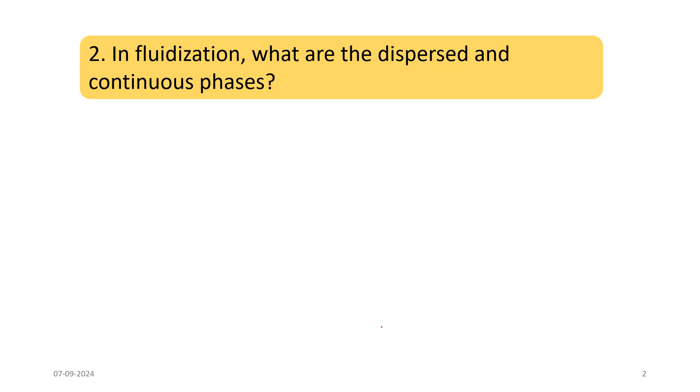In fluidization, what are the dispersed and continuous phases? So, gas or liquid acts as a continuous phase and solid as the discrete or dispersed phase.

Because in the fluidization bed, you have noticed that liquid is coming from the bottom portion and there are solid particles inside it which are floating, and sometimes gas is also there to create bubbles inside the fluidization bed. So gas or liquid is the continuous phase and solid is the dispersed phase.

Next, fluidized beds have what kind of pressure head due to gravity? Static pressure. Yes, the answer is static pressure.

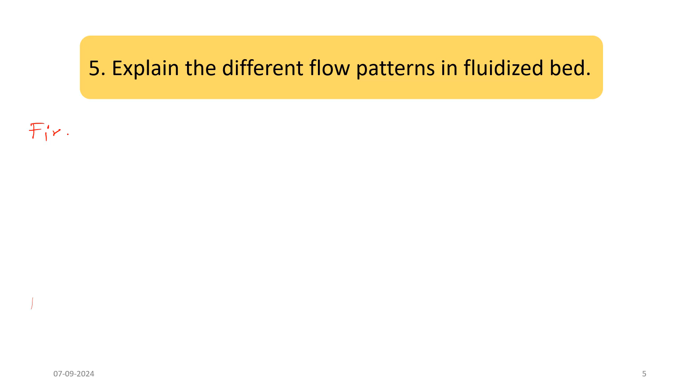Next question: explain the different flow patterns in fluidized bed. Suppose the first one is the fixed bed or packed bed. Here the liquid is filled and it is not moving. It is coming from the bottom and it is fixed, and there are particles inside it, so it is not moving. This is called fixed bed.

Now in the homogeneous bed, the liquid velocity is a little bit increased. So the fluid and the particles inside started mixing with each other and create a homogeneous mixture inside the bed. That is called homogeneous bed.

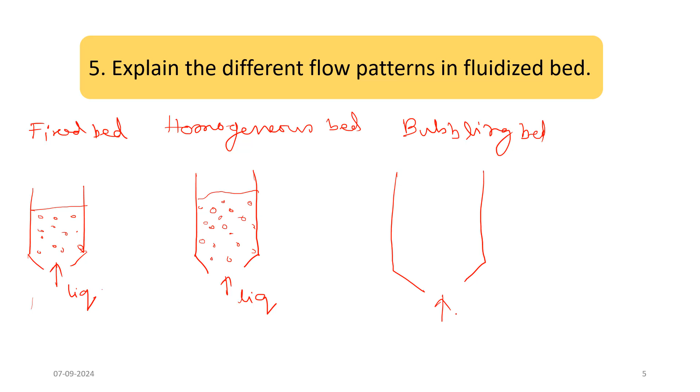Next one is bubbling. In bubbling bed, what happens: now the liquid or gas velocity is further increased. It was very low, then increased here, then increased even more. So because of the solid particles and this higher velocity, the gas will create some bubbles inside it. That is the bubbling fluidized bed.

Next, if the bed height is very long and the diameter is very low, then this bubbling bed is called slugging. The same phenomena, but here the bubble size is a little bit bigger as it goes upward, and solid particles are there and liquid or gas is coming from below. This is slugging.

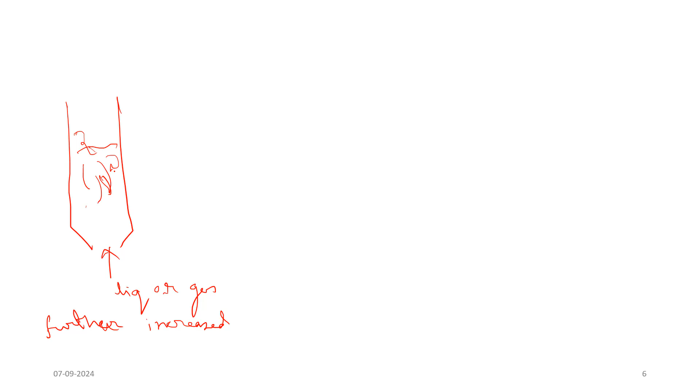Next, the liquid or gas velocity is further increased. So what will happen? It will create some chaotic kind of motion - the bubbles will burst and create chaotic motion inside it, with particles present and fluid or gas creating chaotic motion. So that is called the turbulent bed.

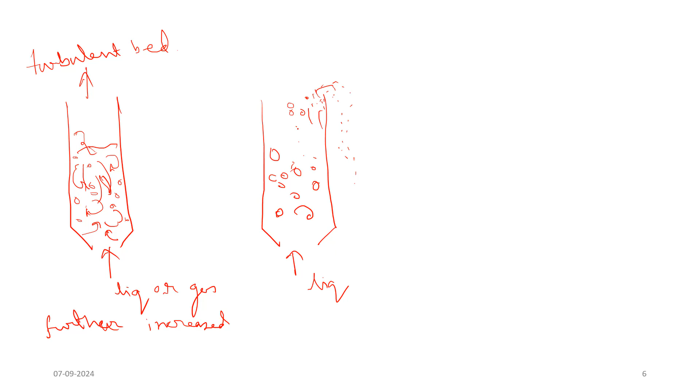And after some time, if we keep increasing the velocity of the liquid inlet, some bubbles or chaotic motion will be there, and some solid particles will be sprouted out from the bed. If particles at the top position of the bed are thrown out of the bed, that is called fast fluidization bed.

After the fast fluidization bed, if almost all the particles are thrown out, then the particle density or concentration will be very less inside the bed, because most of them are thrown out. So very little amount of particles are left in the fluidized bed, and that is called pneumatic transport. These are overall the different types of flow patterns in the fluidized bed with respect to liquid or gas velocity.

Next question: explain the contacting method in fluidized bed.

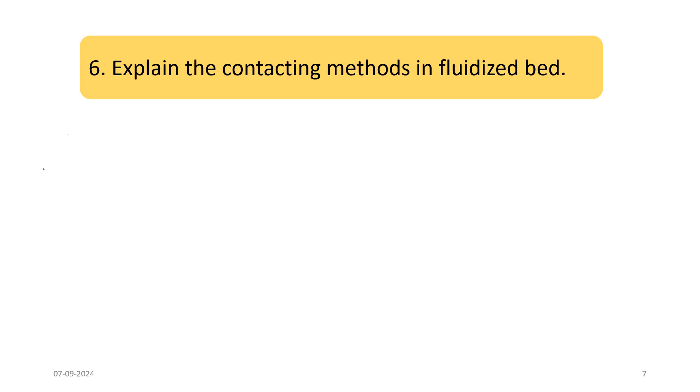Let's explain the contacting method inside the fluidized bed. Inside the fluidized bed, we look at how particles are contacting with the fluid, how fluids are contacting with the solid particles, and how the mixture will work. It is not always that fluid comes from the bottom and solid comes from the top too - it is not like that always. Suppose this is a batch process, it can happen in five different methods.

The first one is the batch process. At a time, some amount of solid particles are given inside the bed, and there is a limited amount of fluid, and the fluidization process is happening. The mixing is happening.

Next one is the co-current. In co-current, liquid is coming from the bottom and solid is also inlet from the bottom, and it will start mixing and both of them will be taken out from the top. So this is co-current.

Next one is the counter current. From the name itself it is very clear what it is. Here the direction of inlet and outlet are opposite. Suppose from the bottom liquid is going in and from the top solid is given inside the bed, and now liquid is taken out from the top, and from the bottom solid is taken out. So the inlet and outlet positions of solids and fluids are opposite - that is counter current.

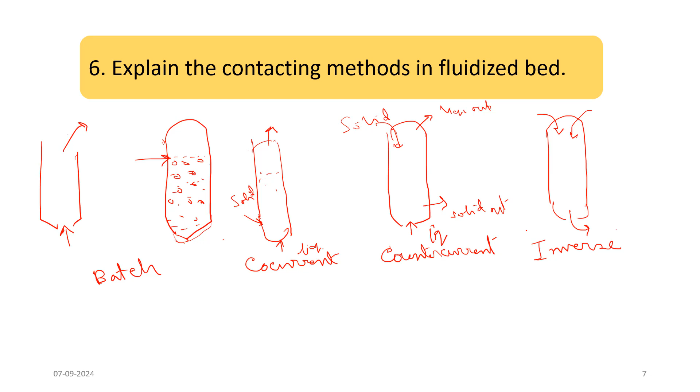Next question: explain the different types of fluidized bed. We'll see one by one the videos of it. I've just told what the fluidized beds are, and we'll see from YouTube so it will be more clear.

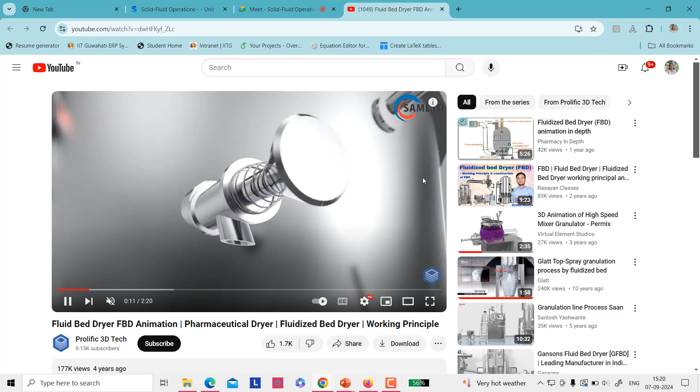This one is the fluidized bed. These are the different parts of the fluidized bed. Particles are given, and with the pressure of this valve and all, pressure is created inside the bed and the fluidization will start.

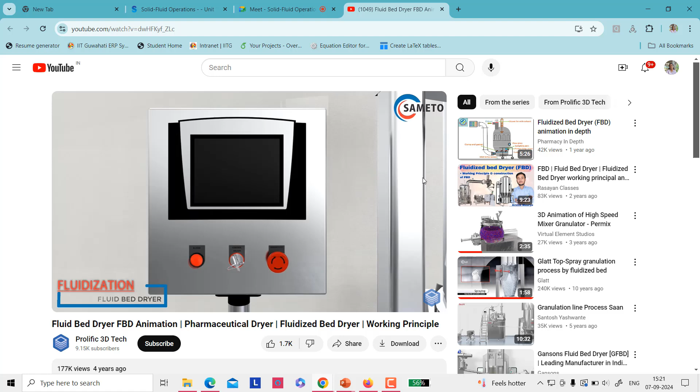You can see that due to the gas or whatever is inside it, solid particles are trying to mix with each other. So this is fluidization in general.

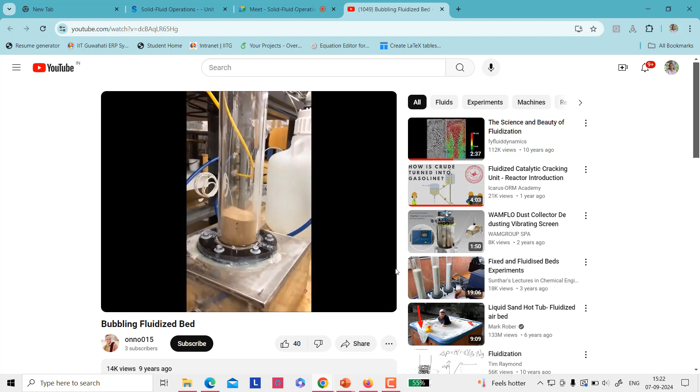Then this is the bubbling bed. I just told that bubbles are coming because the liquid velocity or gas velocity is very high from the bottom, so it creates some pressure inside the whole mixture and creates this kind of bubble. That is bubbling bed or slugging - if the bed is very tall, that is slugging.

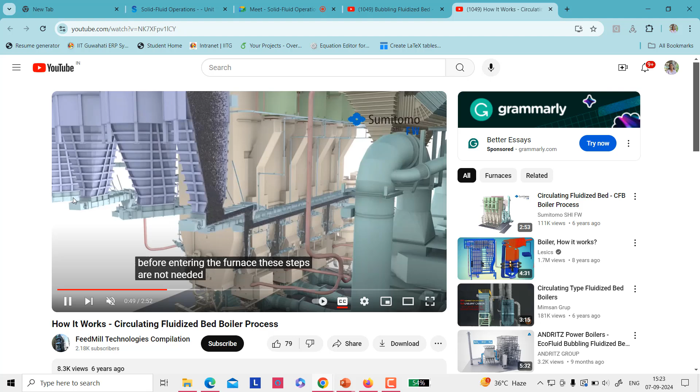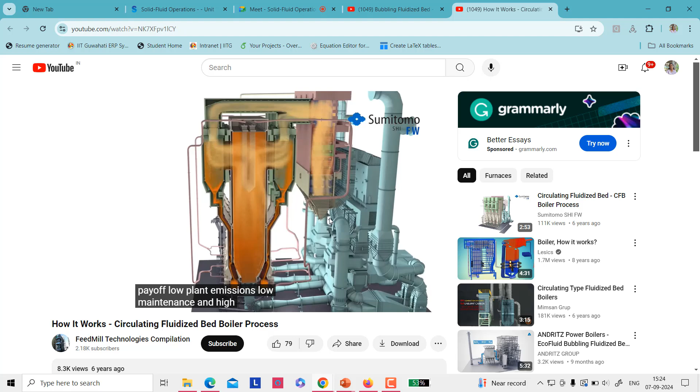You can see there are two extra portions of this circulating bed which are not there in case of a plain fluidized bed. With the help of this, they are maintaining the temperature and the mixing will be good. Heat efficiently throughout the entire burner while fouling and corrosion are minimized. The payoff is low plant emissions, low maintenance and high plant reliability. These extra things help in good combustion, heat efficiency and economic feasibility. So this is a circulating fluidized bed.

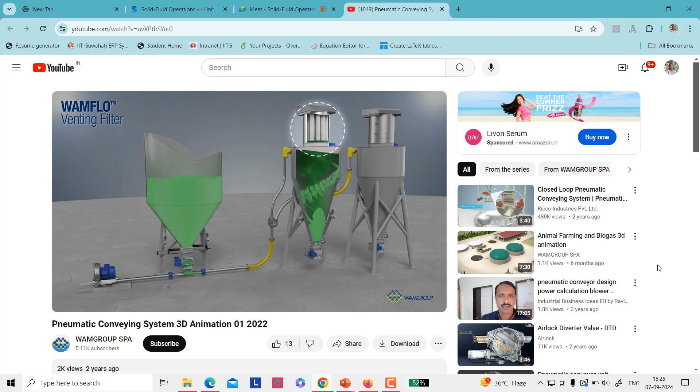Then this is the pneumatic one. Pneumatic means all the particles are out and it is creating a homogeneous kind of mixture. Very little amount of solids are left inside the fluidized bed. So this is a filter.

So this is for a particular company structure, that is why they are showing it.

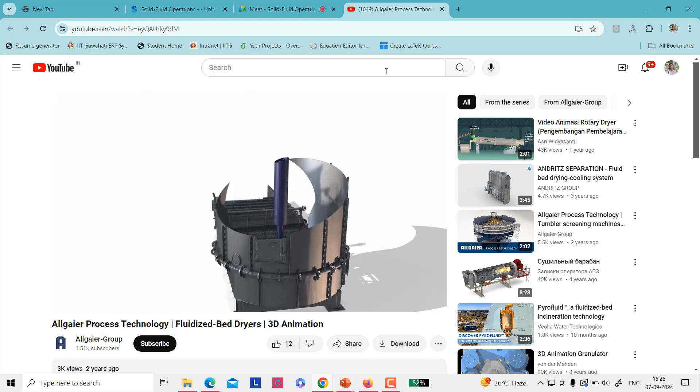Next one is the horizontal, or horizontally/laterally staged fluidized bed. Here cross-current flow or cross-current contact happens between the solid particles and the gas particles.

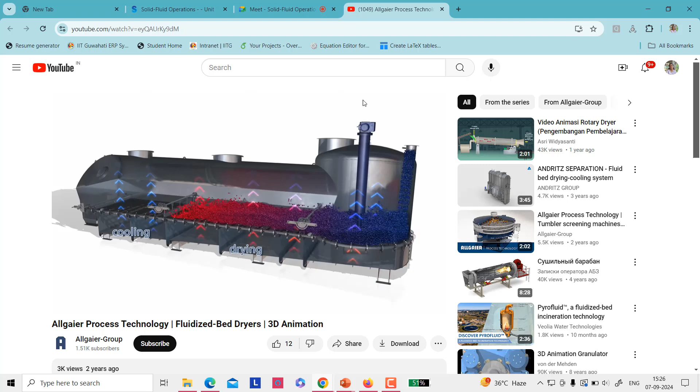You can see the products are feeding, and from each portion some gas is coming for a different purpose - someone is drying and someone is for cooling, but it is a cross-current contacting method. So particles are dried, then cooled.

So this is the example of a lateral staged bed, which uses the cross-current contact method.

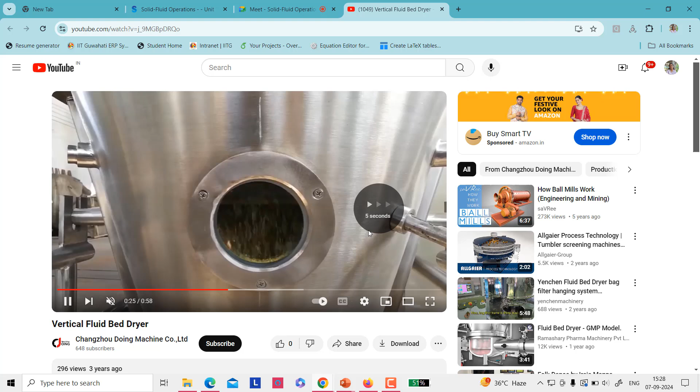This one is the vertically staged bed. All are vertically staged beds we generally notice, so this is one of them. You can see how the fluidization mixing is happening.

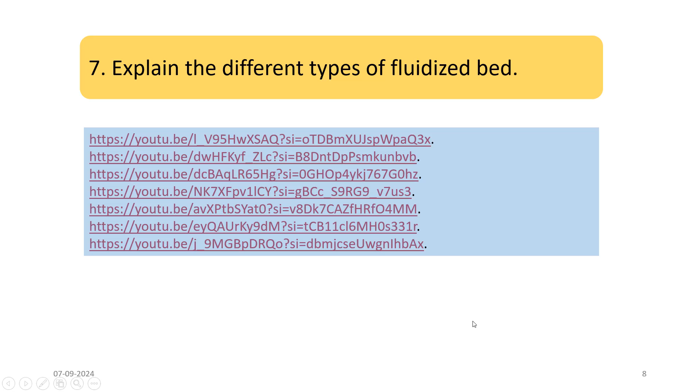So this one is the turbulent one. Here you can see the velocity of the gas is very high, and that is why it is creating a random kind of chaotic motion inside the fluidized bed, which is called the turbulent fluidized bed.

And this one is the spouting bed. Here you can see that from one portion the gas flow is coming, and that is creating some kind of jet inside the fluidized bed. From the top portion, this phenomenon is called spouting - all the particles are falling down, so that is called the spouted bed or spouted fluidized bed.

Next, some advantages and disadvantages of the fluidized bed. First, inside the fluidized bed, solids and liquid mixtures are there, and they behave like a liquid - the solid particles also behave like a liquid. So that is why it is said to have liquid-like behavior.

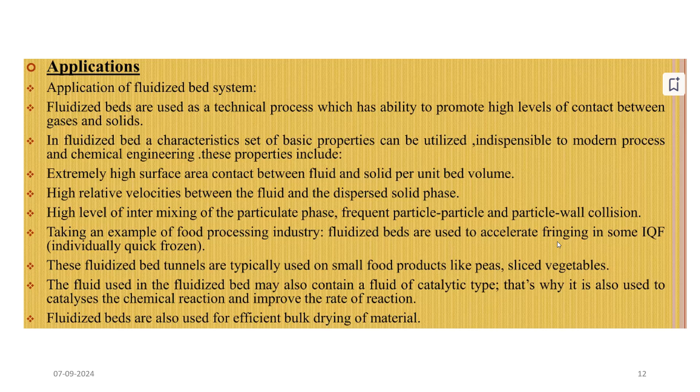This includes drying, coating, coating of the catalyst, granulation, heat treatment, annealing, blending, classification, adsorption, and roasting. So these are all the applications of fluidized bed.

It increases efficiency in dryers by allowing the entire surface of the subject being dried to be suspended and therefore exposed to air. This process can also be combined with heating and cooling, as we have seen in a video of continuous heating and cooling of the solid particles.

Fluidized bed dryers are used in drying various materials such as powder, tablets, granules, coals, fertilizers, and plastic material. Anything can be dried in the fluidized bed. This process is also used in the granulation of pharmaceutical powders.

Fluidized bed coaters are widely used for coating powders, granules, tablets, and pellets, held in suspension in a column of air. Fluidized bed coating is used for taste masking, enteric release, and barrier films on tablets and powders.

Bottom spray coating is used for sustained release and enteric release products, also employed in non-pharmaceutical fields in comparison to their use in pharmaceutical fields, as there are numerous apparatus, process, and product parameters that affect the quality of final pharmaceutical products. So its application is huge.

Next, what is FCC? That is fluid bed catalytic cracking. It is an industrial process. What is that? We'll see.

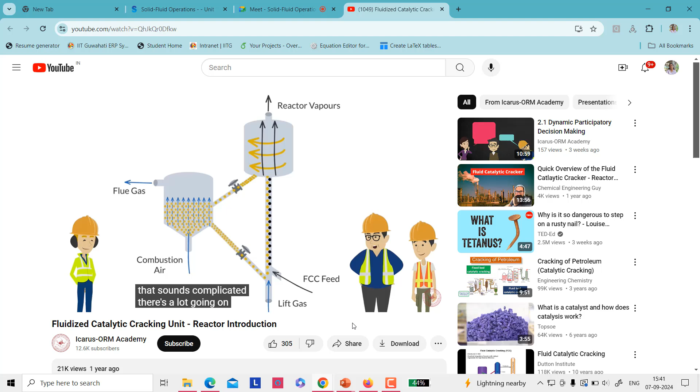Catalyst flows out of the regenerator and mixes with the hydrocarbon steam line. The reaction occurs quickly and the catalyst is deactivated by the reaction depositing solid carbon or coke on the surface of the catalyst. Then it is recycled back to the regenerator. Firstly, the deposited coke on the surface reacts with air. That sounds complicated. There is a lot going on in the reactor and regenerator.

So lift gas and FCC feed is entering from here. Hot regenerated catalysts - catalysts are reusable, so that is why they are regenerated in the last reactor and they are coming back to the reaction.

So heat quickly causes the long chain hydrocarbons to crack, which is an endothermic reaction, and it will reduce the temperature. Coke forms on the surface of the catalyst and reduces it. The cyclone in the reactor disengages the catalyst from the hydrocarbon vapor stream and the vapor exits the top of the reactor. Now the catalyst collects above the spent slide valve and flows to the regenerator.

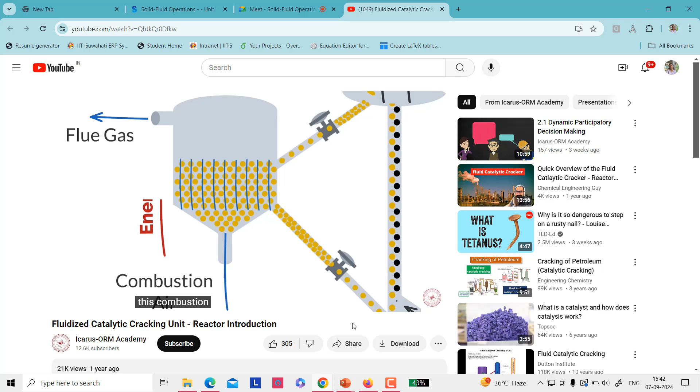This one is the regenerator. Air enters the bottom of the regenerator and combusts with the carbon on the spent catalyst. The temperature in the regenerator is high enough that it auto-ignites this combustion. Here the energy or temperature is increasing for the cracking. So this combustion is providing all the energy.

So this is a continuous process of FCC. The flue gas exits the regenerator, removed downstream, and heat is recovered before it is vented to the atmosphere. So the reactor here we are using in different phases. That is nothing but the fluidized bed reactor. Different kinds of fluidized bed reactor.

In order to circulate the catalyst through the system, the FCC reactor is a high-risk process to operate as there is an oxygen-rich atmosphere in the regenerator connected to the reactor, which is a hydrocarbon-rich atmosphere operating at a temperature above that required for auto-ignition. The consequences of misdirecting air into the reactor or hydrocarbon into the regenerator are a fire or potential explosion. So that is a different thing.

So the main thing is, in the FCC plant, the reactors used are fluidized bed reactors because here the gas is generated and coming through, but here the catalyst is a solid catalyst, which enhances the process. So this is the overall overview of FCC.

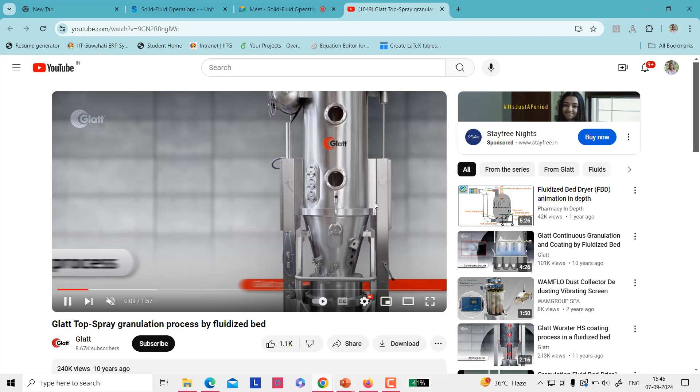So feeds are charged inside the fluidized bed, which is a charging process. Then fluidization happens because gas is coming, a constant air stream is coming from the bottom. And now spraying is happening, a reproducible granulation process, so one particle is attached to another particle and it creates granules of multiple particles.

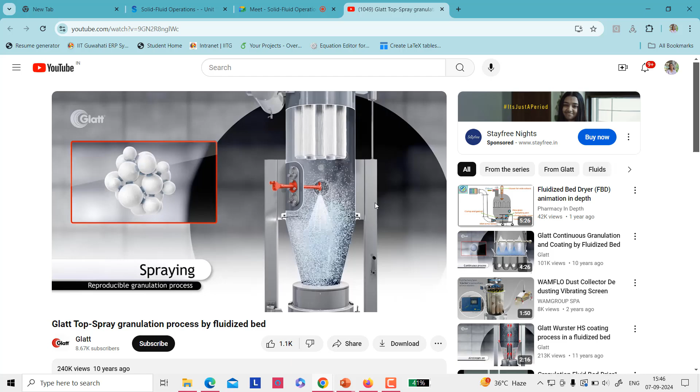So after the formation of granules, there should be a drying process. So finally they are dried. Now fluidization is off and the dry particles are ready, ready for discharging.

So these are the filters they use to maintain it. This is a nozzle from where the spraying is happening. Atomizing air or liquid, both can be sprayed. So this is the whole granulation process.

Next, the velocity where the frictional force between particle and fluid just counterbalances the weight of the particle is called what? The velocity where the frictional force between particles and fluid just counterbalances the weight of the particles is called what?

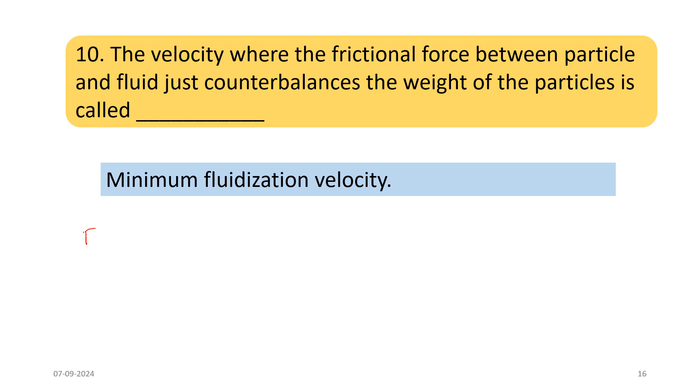At this velocity, all the particles are just suspended. That means this is the situation between a fixed bed and a fluidized bed. In the fixed bed, the particles are fixed, and in the fluidized bed, all are moving. So minimum fluidization means the particles are just suspended inside the bed. That moment is called the minimum fluidization velocity, and at this point the frictional force between the particle and the fluid just counterbalances the weight of the particle.

Next, what is the value of the minimum fluidization void fraction for spherical particles? What is the value of the minimum fluidization void fraction for spherical particles?

So what is the value of minimum fluidization void fraction for spherical particles? 0.4 to 0.45. Yes, 0.4 to 0.45.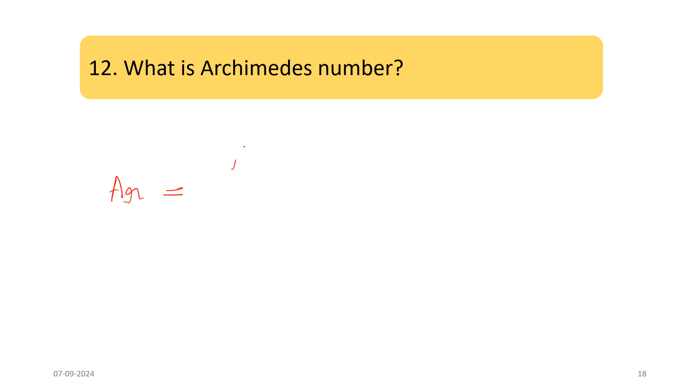From the minimum fluidization velocity derivation, which we'll see later, the Archimedes number comes out. The expression is rho F into rho P minus rho F, into dP cube G, by mu square.

This is the expression of Archimedes number. How this is coming, we will see the derivation after some time. Rho F is the fluid density inside the fluidized bed, rho P is the particle density, dP is the diameter of the particle, G is the gravitational acceleration, and mu is the fluid viscosity. This is the expression of Archimedes number, or it can be called as Galileo number.

Next, voidage at the onset of fluidization. Voidage at the onset of fluidization may be considerably greater than the packed bed voidage. Is it true or false?

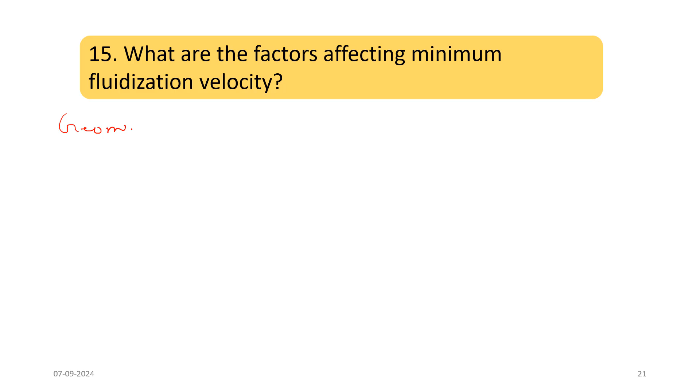Next, what are the factors affecting minimum fluidization velocity? Bed diameter, particle size, height - yes. So first one is the geometric variables, second one is physical properties, and last one is thermodynamic conditions.

In the geometric variables, bed diameter, bed height, particle size, and hole diameter are important.

In the physical properties, fluid density, fluid viscosity, all the fluid properties are important. Then fluid surface tension and the slurry concentration are important for physical properties. In case of thermodynamic properties, that means temperature, how much temperature the fluidized bed is maintained and at what pressure it is maintained - these are important for thermodynamic conditions.

Next, ma'am please solve the assignment. Okay, so we'll come back to it later. First, so which one?

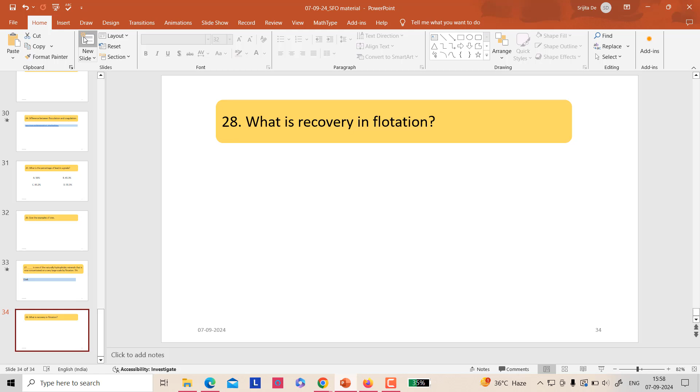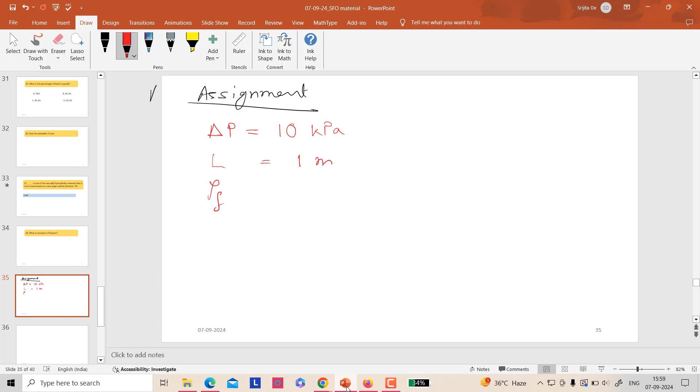Then solid particle density - no, we need to calculate particle density. So fluid oil density is given, rho F is 900 kg per meter cube, and bed porosity is given, which is 39%, 0.39.

So rho S needs to be calculated. From the minimum fluidization formula, we can apply delta P over L equals 1 minus epsilon into rho S minus rho F into G, since it is said that these are the onset of minimum fluidization conditions. So if we put all the values: delta P is 10 kPa, suppose 10 into 10 cube, L is 1, 1 minus 0.39, rho S needs to be calculated, rho F is 900, G is 9.81. So let's see how much it is coming.

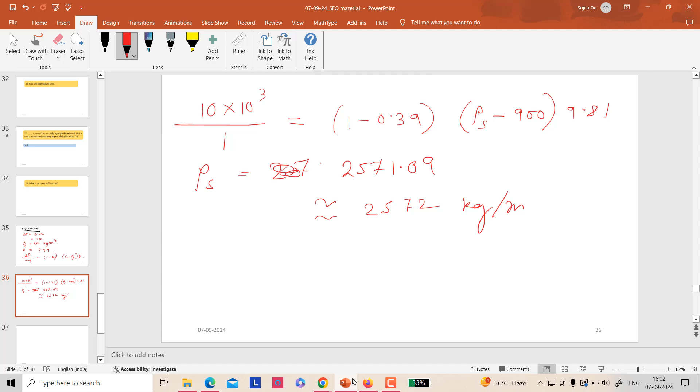Yes, it is coming as 2572, right? So rho is coming as 2571.09, almost 2572 kg per meter cube. So this is the answer, 2572. Option C.

So this is question number 5. Question number 7 is: a bed of spherical particles, specific gravity 2.5, of uniform size is to be fluidized in a fluidized bed at a minimum fluidization velocity. At this minimum condition, the porosity is 0.4. The Ergun equation for the above particle-fluid system in the fluidized bed at minimum fluidized condition is expressed as this, and if water is to be used as the fluidizing medium, then the minimum fluidization velocity wants to be calculated.

So, just a minute. Okay, so first we need to calculate the pressure drop, that is delta P by L. So for delta P by L, from the expression we know that it is 1 minus epsilon mf, that is the porosity, into rho s minus rho f into g. This is the expression. So pressure drop...

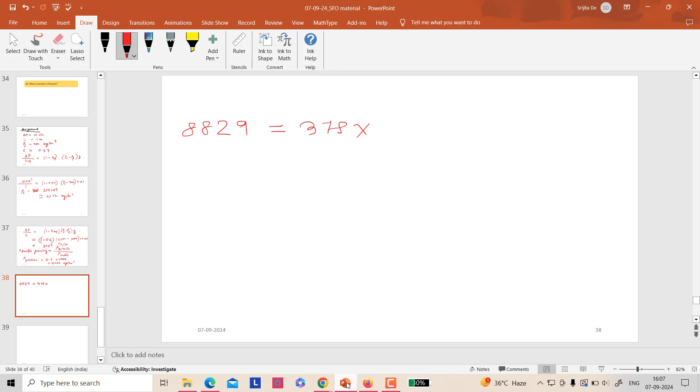Yes, so this is the first step. Now we will use the equation that is given: delta P by L. Our delta P by L is known, that is 8829, right? Now 375 into 10 cube UMF plus 10.94 into 10 to the power 6 UMF square. So this is the equation, right?

So you can solve it using the Sridharacharya equation, right? So we can write it in this way. You know the equation ax square plus bx plus c equals to 0. You know how to solve it, right? X equals minus b plus or minus root of b square minus 4ac, by 2a. We will apply the same equation here.

So in our case, x is the UMF. Minus b means: minus 375 into 10 cube, then plus minus root under b square, that is 375 into 10 cube whole square, minus 4, a is 10.94 into 10 to the power 6, into c is 8829, right? And divided by 2 into a, that is 10.94 into 10 to the power 6. Now what we will get, that is your answer. So can you calculate that?

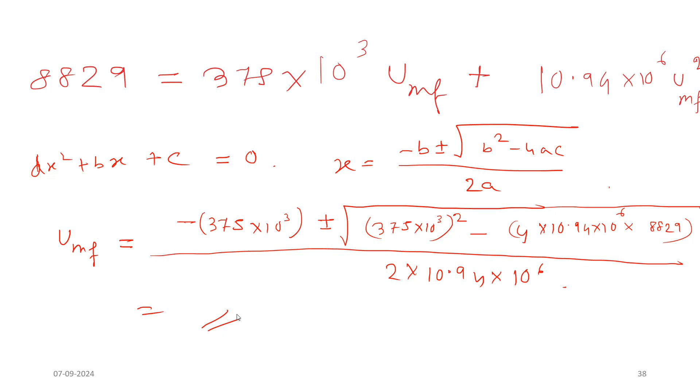Okay. So how much is it coming? Let's calculate. How much is it coming? My answer, yes, just a minute. 0.0054 metre per second. Just a minute, I need to calculate.

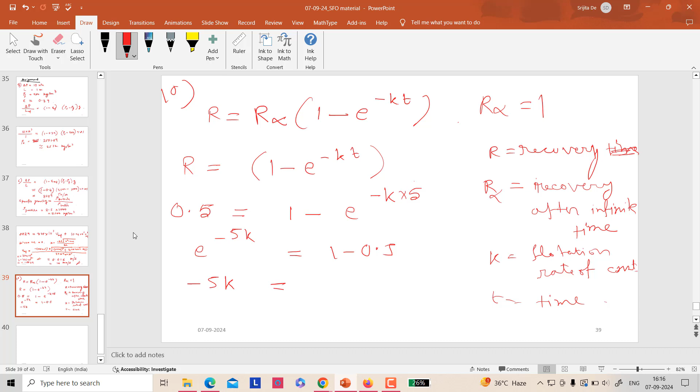We take logarithm: minus 5k equals ln of 1 minus 0.5. Now k can be calculated as ln 0.5 divided by 5, which comes to 0.1386 per minute.

So from the first portion of the problem you have got k. Now in the second portion it is asked to calculate the time, where recovery is 75% for the same element, copper sulfide, so k will be the same. In this second case, R is 0.75 equals 1 minus e to the power minus 0.1386t, and we need to calculate the time.

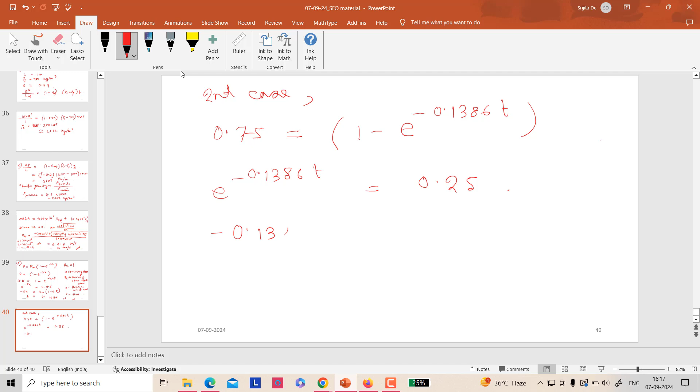So similarly we calculate: e to the power minus 0.1386t equals 1 minus 0.75, that is 0.25. From here we calculate t, which comes out to almost 10, that is 10 minutes. So this is the answer: 10 minutes.

Now we'll go back to our questions.

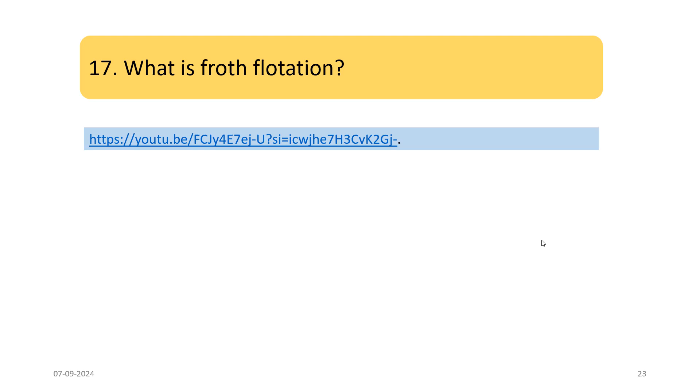You can see feed coming from the left side, and air coming from the middle, creating a rotational pulp flow, and froth is happening. The pulp flow is created, air goes through, and because of the hydrophobic nature of the collectors, small particles get attached with them and keep floating in the solution. The sulfides are collected by the air bubbles. Then this air is lost, and the sulfides come back to the solution and reattach with the next bubble. This is called bubble coalescence.

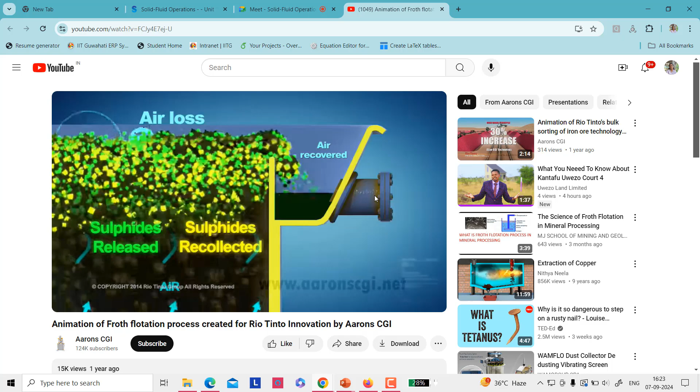So froth flotation is a process that selectively separates materials based upon whether they are hydrophilic or hydrophobic. This is one kind of separation process which is done by froth flotation.

So next is the minimum fluidization velocity derivation. I think you will be able to do it because it is in the lecture itself. Or if I get time, I will solve it later.

Next question: small contact angle leads to weak bubble adhesion. Is it true or false? Small contact angle leads to weak bubble adhesion in case of froth flotation.

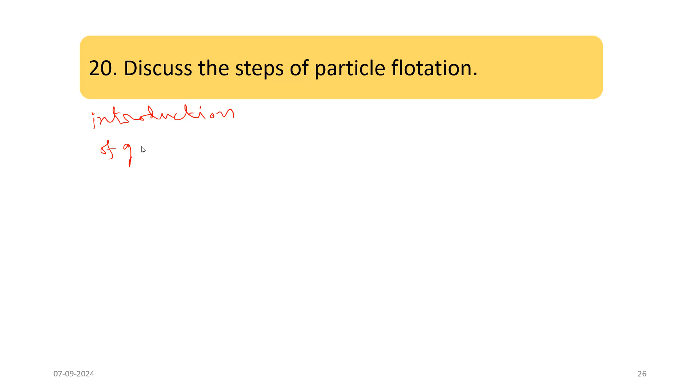Next, discuss the steps of particle flotation. In case of particle flotation, first what happens? You have seen the video. In the video, if you remember, the first one is the introduction of gas bubbles into the slurry. This is the first step.

Next is the collision between the gas bubbles and the suspended matter which needs to be floated. Suppose there are dirt particles inside a water beaker or water filter, so we need to separate the dirt particles. Froth flotation or particle flotation can be a method. So here we are sending some air bubbles, and the air bubbles will collide with these dirt particles which are floated, suspended inside the water. This is the second step.

Next is the attachment of the bubbles to the surface of the suspended matter. That means these dust or dirt particles will be attached on the surface of the bubbles, the way you have seen in the videos. This is the third step.

Fourth one is collision between gas-attached suspended particles, with the formation of the agglomerates. So now these dirt particles are attached with the air bubbles, so they will create collision among themselves. This is the fourth step.

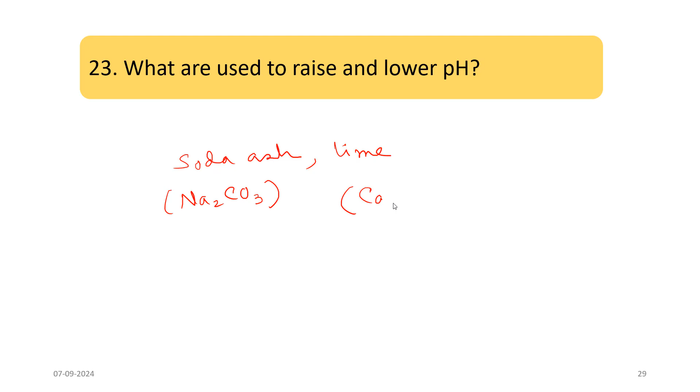Next, what are used to raise and lower pH of a solution? So soda ash or lime. Soda ash means sodium carbonate, that is Na2CO3, and lime is calcium oxide, CaO. These are used to raise pH, and for lowering the pH, sulfuric acid would be used. This is used to lower the pH.

Next, difference between flocculation and coagulation. So you can see a video from the...

So here you can see that in flocculation, first flocculant is given. So they will show it differently.

Crucial steps in water treatment to remove impurities and particles from water. So this is a treatment tank and mixer, fill the tank with the water. First one is the coagulation process. In untreated water, some particles will settle down due to large size by gravity, but tiny suspended particles will not settle down easily.

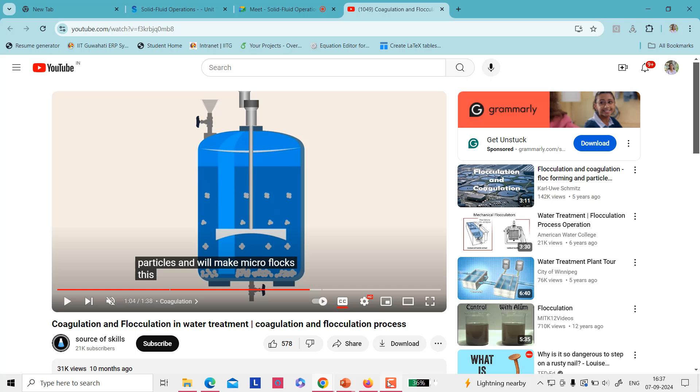After mixing, stop the agitator, the coagulant reacts with suspended particles and will make microflocs. So the particles which are suspended individually, after the mixing, they will come together and create micro sized flocs. This is the coagulation. Now if the suspended particles become micro size, then it is easy to separate them, because their size is now bigger and they will settle down at the bottom.

And in case of flocculation, polymer is taken as flocculant and agitators are turned off. So it will allow the flocs to grow in size and settle down in a few minutes. So coagulation is helping to create the microflocs and flocculation is helping to settle down these microflocs. Okay, so this is a basic difference. There are maybe other differences also, but we'll not look into much on that.

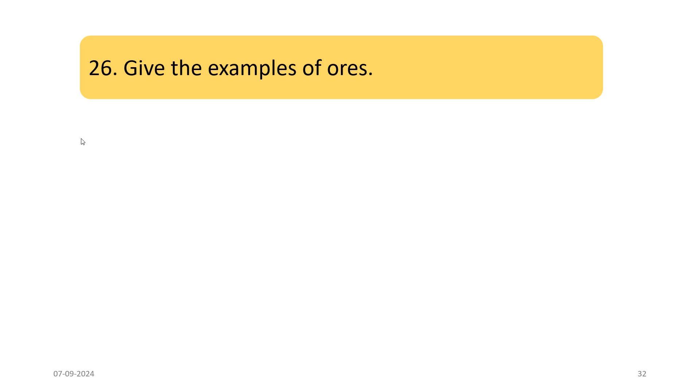Next, what are the different types of ores used in flotation in industry? So mainly there are two types. First one is the lead zinc ores, and second one is the copper ores. So there are some divisions also. PbS is one of the lead zinc ores, PbCO3, PbSO4, PbSb, PbAs, PbBi, PbCrO4 - there are different types of lead-based ores. And in copper based, there is copper sulfide, that is Cu2S, CuS, CuFeS2, Cu5FeS4, etc. These are the copper ores.

Next question is, which is one of the naturally hydrophobic minerals that is now concentrated on a very large scale by flotation? The answer is coal. Coal is a naturally hydrophobic material used in flotation.

Next question is, what is the recovery of flotation? So just recovery, we have learned how it is coming. We can see that, suppose in chemical reaction engineering we will see how a reaction occurs. If it is a first order reaction, then how a reaction occurs, what is the rate constant, and at what time the reaction finishes, that is dependent on the rate constant or reaction mechanism. So it is also coming from here.

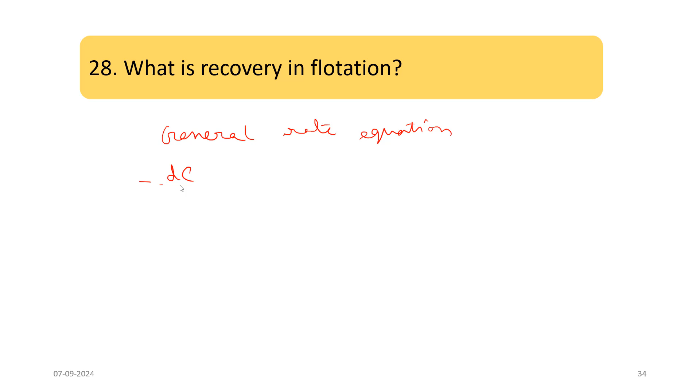So generally the general rate equation is given as minus dc/dt equals k c to the power n. C is the concentration of the material, n is the order, C is the concentration, t is time, and k is the rate constant. In this case, it is the flotation rate constant.

So if it is a first order reaction, if n is 1, then minus dc/dt equals kc. So if we integrate it, from where? Suppose at initial time when the process has not started, the concentration is C0, and after the mechanism or reaction ends after time t, the concentration becomes C. So we integrate this equation from C0 to C.

So if you integrate it from 0 to t time and from C0 concentration to C, we will get a general equation which is C equals C0 e to the power minus kt. That is the integration formula.

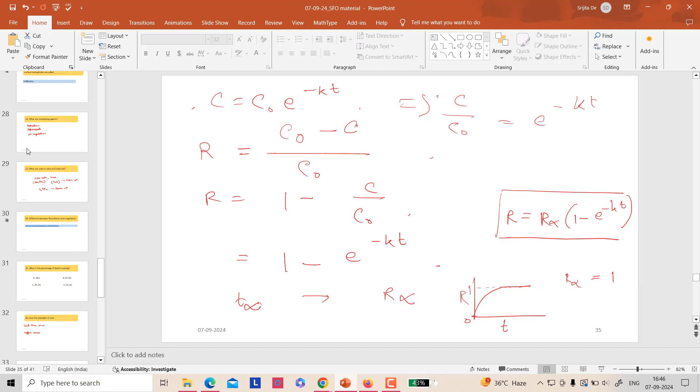So one thing is left before, that is the derivation of the minimum fluidization velocity. You have known that in minimum fluidization velocity, the condition is that at this velocity, the frictional force between the particles and the fluid just counterbalances the weight of the particles.

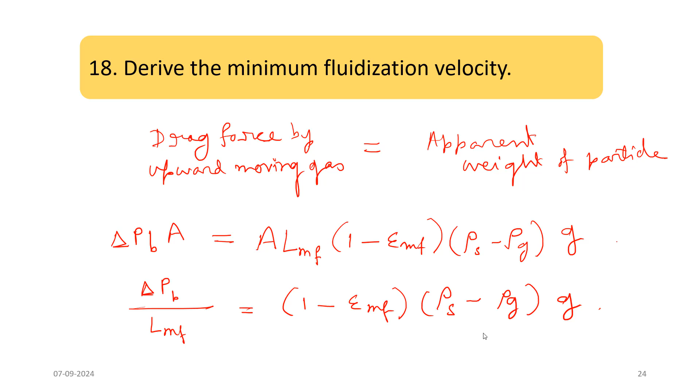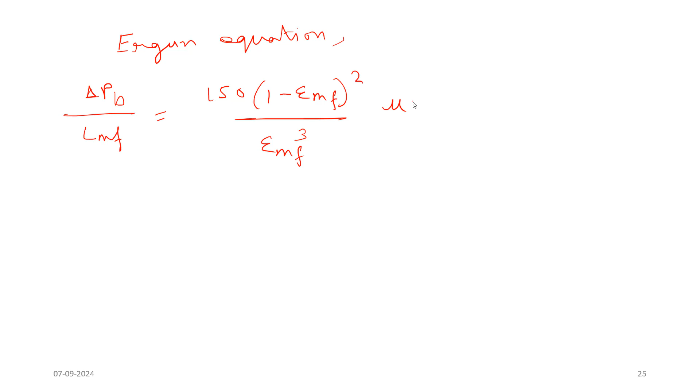Next comes, from the Ergun equation in earlier week we have seen the pressure drop for minimum fluidization condition will be 150 into 1 minus epsilon mf square divided by epsilon mf cube, mu into u divided by phi s square dp square, plus 1.75 into 1 minus epsilon mf by epsilon mf cube into rho g u square by phi s dp. So this is the Ergun equation based on the minimum fluidization velocity.

So here you can write it as Umf also, because we are considering the minimum fluidization condition. So now if we bring in the expression of delta Pb by Lmf, which is 1 minus epsilon mf into rho s minus rho g into g, equals the right hand side, which is 150... this is the expression of the Ergun equation.

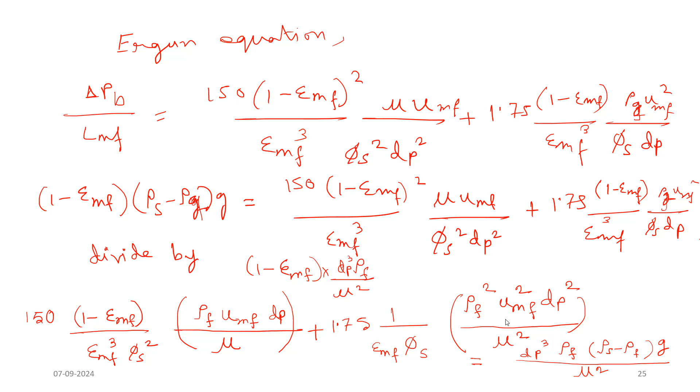So if we simplify it, we can write it like this: 1.75 by phi s epsilon mf cube - there is epsilon mf cube here and here and here. So 1.75 by phi s epsilon mf cube, then REMF whole square, plus 150 into 1 minus epsilon mf divided by epsilon mf cube phi s square, into Reynolds number at minimum fluidization condition, equals to Archimedes number.

So now we can write it simplified: K1, suppose this is K1, this is K2. So K1 REMF square plus K2 REMF equals to AR. This is nothing but a quadratic equation which needs to be solved by Sridhar Acharya method, and here REMF will be minus K2 plus or minus square root of K2 square plus 4K1 AR, divided by 2K1.

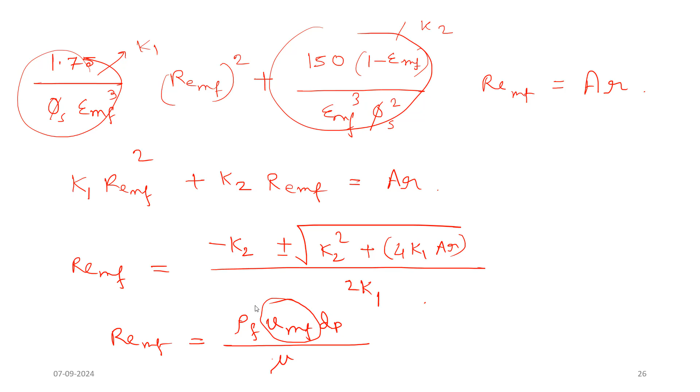So from here we'll get the Reynolds number, and from Reynolds number we'll get the minimum fluidization velocity, because it is the expression of minimum fluidization velocity. So here we'll get the minimum fluidization velocity expression. Okay, so this is the expression.

Now we'll do some extra problems which I will be telling. So very fast we'll do some problems, easy problems. So first one: a 0.5 meter height bed of 1 millimeter diameter glass sphere.

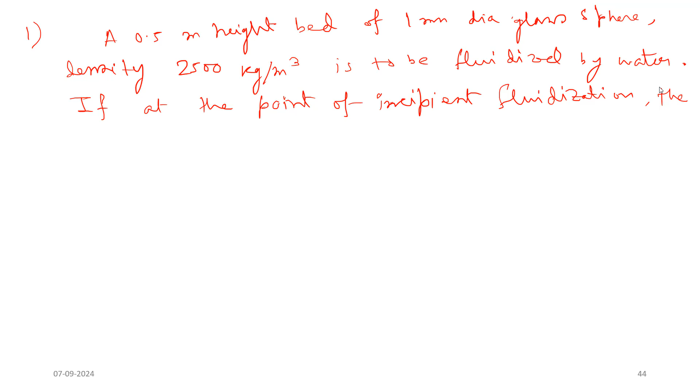A 0.5 meter height bed of 1 millimeter diameter glass sphere, density 2500 kg per meter cube, is to be fluidized by water. If at the point of incipient fluidization the bed voidage is 40%, calculate the pressure drop across the bed. Okay, this is very simple.

So from the simple formula we'll use del P by L equals to 1 minus epsilon at minimum fluidization condition, into rho s minus rho f, into G. So delta P needs to be calculated. Epsilon is given as 40%, that means 1 minus 0.4. Solid density is 2500, water density is 1000, G is 9.81 and delta L is 0.5, which is nothing but...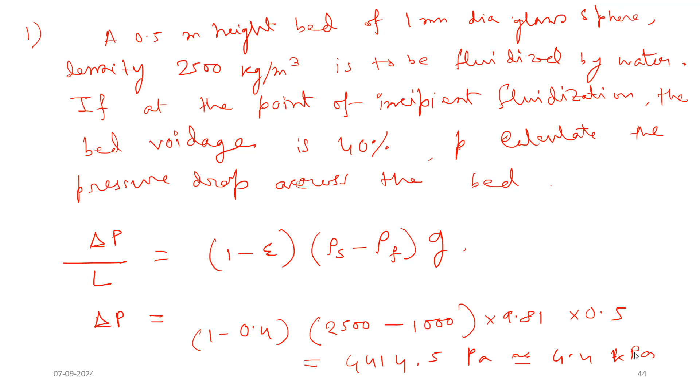4414, 4414.5 Pascal, equals to 4.4 kilopascal. This is the first problem. Okay, this is a simple, very simple problem.

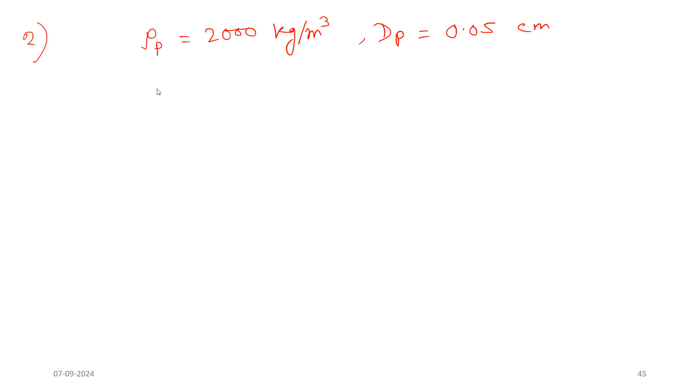Next one. So here I am writing the important things only. Pressure drop in an air fluidized bed of catalyst particles. So its particle density is given, rho p is 2000 kg per meter cube, and diameter of the particle is 0.05 centimeter. I am not writing the whole problem, you can write also. So catalyst particles of 60 centimeter bed depth, that is L is 60 centimeter, and bed porosity, epsilon, is 0.5.

Now calculate the pressure drop in centimeter of water. So calculate the pressure drop in centimeter of water. So similarly the problem will happen.

So what is delta P? It needs to be calculated as 1 minus epsilon, rho P minus rho F, into G into L. So it is 1 minus 0.5, rho P is 2000, air fluidized bed so air density is 1.23, we know G is 9.81 and L is 0.6, that is 60 centimeter means 0.6 meter. So what will it come?

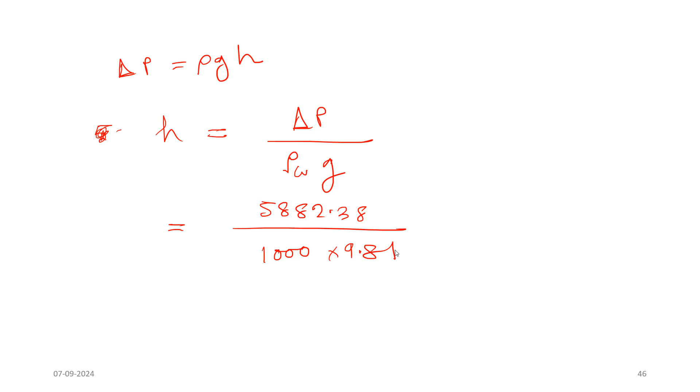Delta P is 5882.38, rho of water is 1000 into 9.81. So it is 0.5996 meter, which is 59.96 centimeter, almost 60 centimeter.

So this is the answer. Okay, last problem.

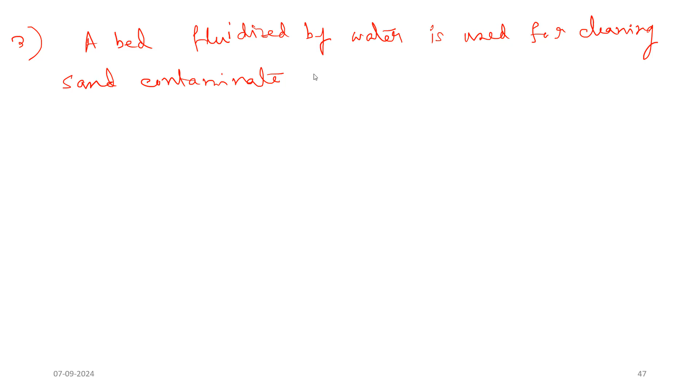This problem needs to be written. A bed fluidized by water is used for cleaning sand contaminated with salts. The particles of sand and salt have the same shape and size but different density. Rho of sand is 2500 kg per meter cube and rho of salt is 2000 kg per meter cube.

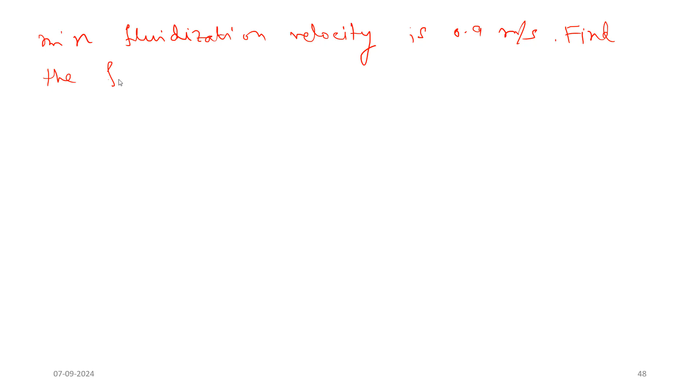If the initial volume fraction of salt in the mixture is 0.3, and if the initial minimum fluidization velocity is 0.9 meter per second, find the final value of UMF, that is minimum fluidization velocity in meter per second, when the sand is washed free of salt.

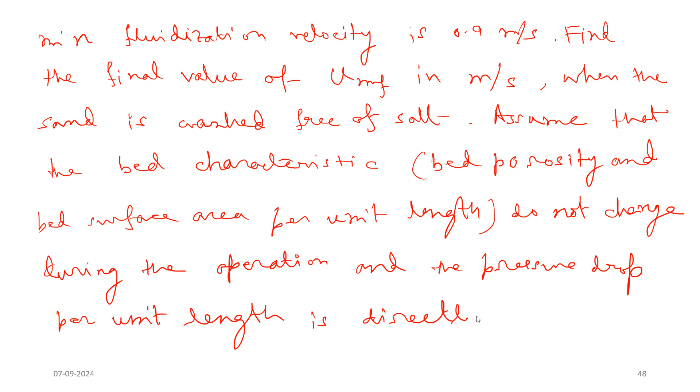Assume that the bed characteristics, that is bed porosity and bed surface area per unit length, do not change during the operation, and the pressure drop per unit length is directly proportional to the fluid velocity.

Okay, so this is a big problem. Let's do it. Actually, it's not a big problem - the question is big, but not the equation or the solution.

For the minimum velocity, we know that delta P by L equals (1 minus epsilon)(rho P minus rho F) into G. In the question, it is said that delta P by L, pressure drop per unit length, will be proportional to the fluid velocity, that is UMF. So this term (1 minus epsilon)(rho P minus rho F) into G will also be proportional to UMF.

We know G is a constant and porosity of the bed is also constant, as stated in the question. So rho P minus rho F will be proportional to UMF - density difference will be proportional to minimum fluidization velocity. So we can write UMF2 by UMF1 equals (rho P2 minus rho F) divided by (rho P1 minus rho F). This is the connection between density difference of particles and fluid with minimum fluidization velocity.

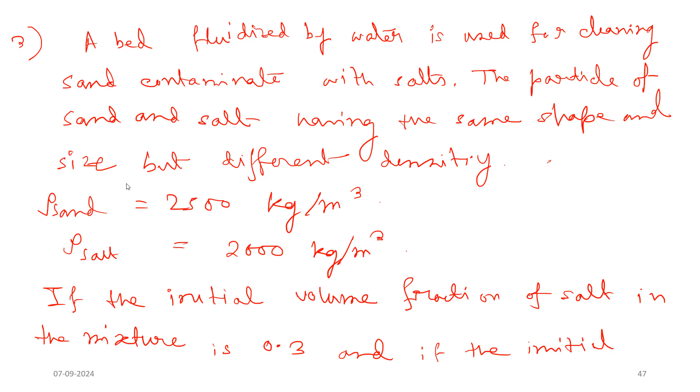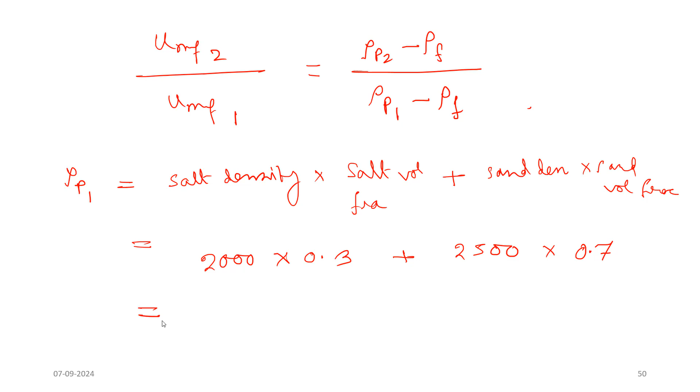So we need to calculate the minimum fluidization finally. Rho P1 is the average density according to the given sand and salt fraction. Initially, in the fluidized bed, both sand and salt are present but their volume fractions differ. So initially: salt density into salt volume fraction plus sand density into sand volume fraction. Salt density is 2000 and salt volume fraction is 0.3, plus sand density 2500 into 0.7 (since sand fraction is 0.7). This comes to 2350 - so initially the particle density in the fluidized bed is 2350 kg per meter cube.

Next, rho P2 is the condition where the salt is washed away - totally washed away, as stated, the sand is washed free of salt. So only the remaining particle is sand, that is sand density, which is 2500 kg per meter cube.

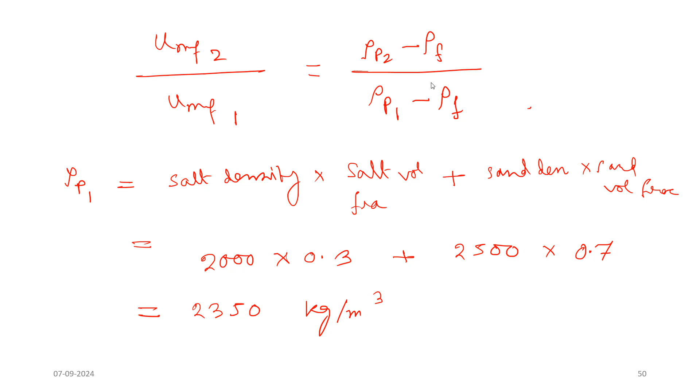Now coming to the equation, another term is rho F - rho F is the water, so water density is 1000 kg per meter cube. Initially, the minimum fluidization velocity given in the question is 0.9 meter per second. So everything is known according to the equation.

Only UMF2 needs to be calculated from our equation. So UMF2 divided by 0.9 equals (2500 minus 1000) divided by (2350 minus 1000). So the minimum fluidization velocity in the second case will be 1 meter per second, which is our answer.

So when the salt is washed away and only the sand is left, the minimum fluidization velocity will be 1 meter per second.